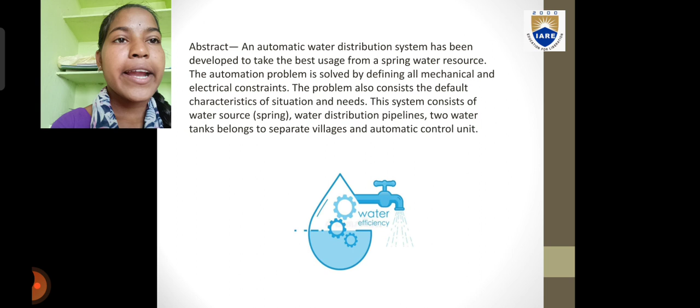The system consists of a water source spring, water distribution pipelines, two water tanks belonging to separate villages, and an automatic control unit. Now, introduction to potable water. To find potable water, which is the first indispensable need of man, is an indisputable fact. A growing population and industrialization cause environmental and water pollution.

Therefore, the problem of finding clean and drinkable water is one of the most important and emerging problems in the world. Therefore, potable water obtained from the water source most efficiently, cleanly, with less energy expenditure of consumption, and also supplied to the user is very important.

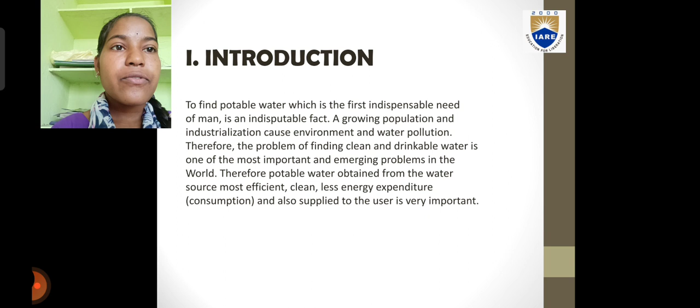The problem of control of water resources has been part of environmental, agricultural, economic, and health subjects. With the water obtained from the source, there are also some problems such as distribution, wasting, and control. Tavares has studied theoretically about water distribution networks. He has developed nonlinear dynamical models and controllers to monitor the level of the water in the canal system of NuHCC in Portugal.

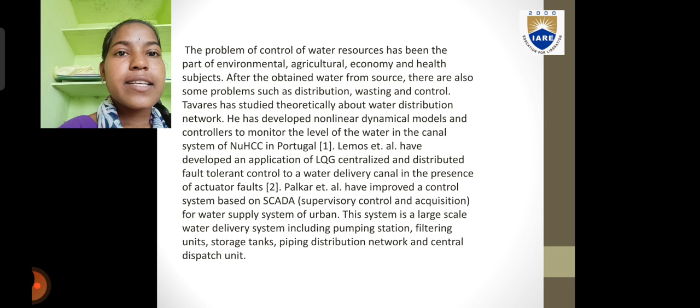Lemos et al. have developed an application of LQG centralized and distributed fault tolerant control to a water delivery canal. In the presence of actuator faults, Palkar et al. have improved a control system based on SCADA, supervisory control and data acquisition, for an urban water supply system. This system is a large scale water delivery system, including pumping station, filtering units, storage tanks, piping distribution network, and central dispatch unit.

Baume et al. have developed models and controllers for irrigation canal systems, characterized by time delays, nonlinear features, and interactions among subsystems. Corriga et al. have used structural Petri nets for modeling of irrigation canal networks. Because of diverse and comprehensive literature, only the water canal networks and control of water levels and pressure were examined. In this study, a virtual water resources automation problem is solved by defining all mechanical and electrical constraints.

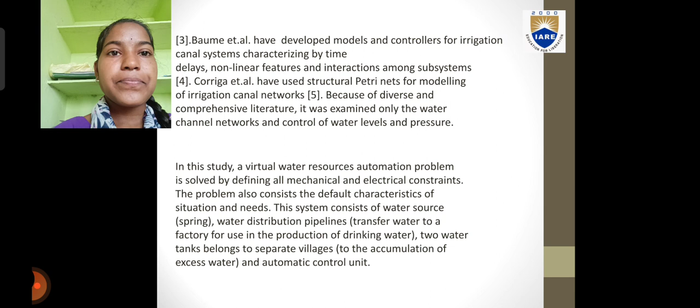The problem also consists of the default characteristics of situation and needs. The system consists of a water source spring. Water distribution pipelines transfer water to a factory for use in the production of drinking water. Two water tanks belong to separate villages for the accumulation of excess water. And an automatic control unit.

A choice machine algorithm is used for solving the problem, with an electronic platform on which to run the algorithm. The system features are expected considering that the unit is divided into different tasks. The characteristics of each unit, tasks, and equipment planned to be used are determined.

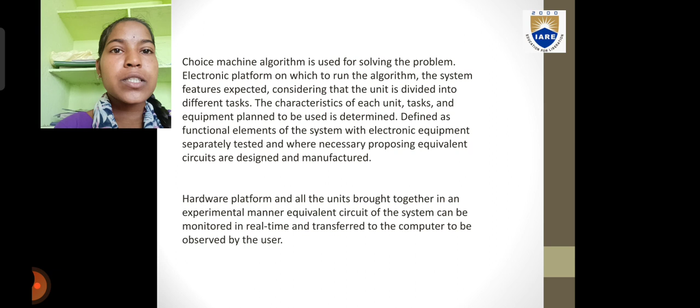Defined as functional elements of the system, electronic equipment is separately tested and, where necessary, equivalent circuits are designed and manufactured. With the hardware platform and all units brought together in an experimental manner, the equivalent circuit of the system can be monitored in real time and transferred to the computer to be observed by the user.

Material and methods. Problem. The intended embodiment is a remote monitoring and automatic control system of a water supply. A certain amount of the total water generated should be primarily forwarded to the factory so that the source can be used efficiently in all conditions. Once this condition is met, the water will be stored at equal levels in two separate tanks to use as potable water in residential areas near the source.

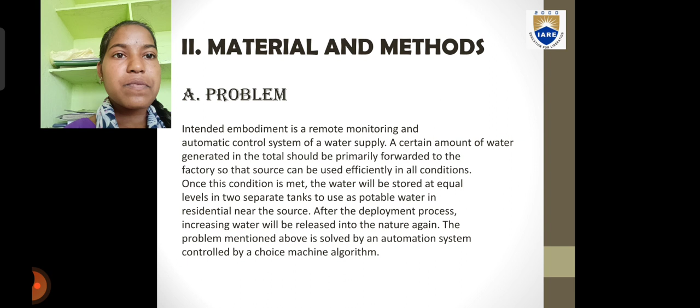After the deployment process, excess water will be released into nature again. The problem mentioned above is solved by an automation system controlled by a choice machine algorithm. Modeling of water supply automation system. Due to geographical conditions, it is assumed the main source facility is unable to connect to the village stores with wired communication. Therefore, storage nodes placed in the store have to communicate wirelessly with the central control unit.

The waterway system is made with two outgoing lines for each store, two conveyance lines for the plant, and one flood line to protect the facilities from very high spring flow. These five different lines from the water to the arriving points will be redirected by using the choice machine algorithm. The algorithm will generate commands to control opening and closing of each valve.

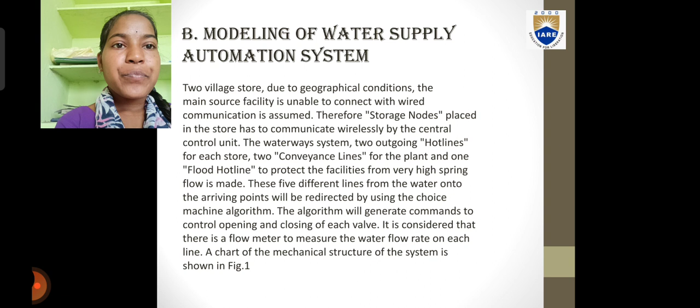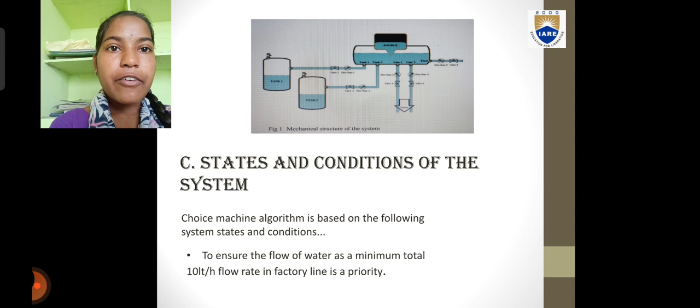States and conditions of the system. The choice machine algorithm is based on the following system states and conditions: to ensure the flow of water, a minimum total 10 liter per hour flow rate in the factory line is a priority. The level of water to be transferred to the tank has to be observed continuously. The difference of the two tanks' water level should not be more than 30% of the total volume.

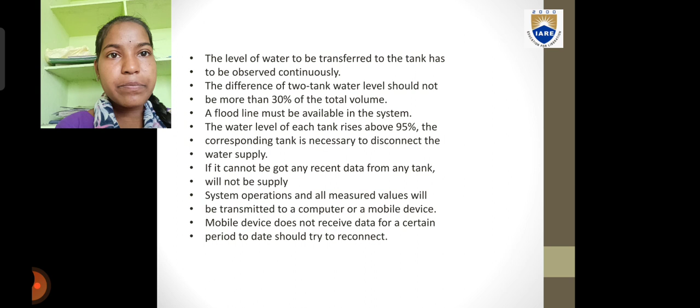A floodline must be available in the system. If the water level of each tank rises above 95%, the corresponding tank is necessary to disconnect from the water supply. If no recent data can be got from any tank, it will not be supplied. System operations and all measured values will be transmitted to a computer or a mobile device. If mobile devices do not receive data for a certain period, they should try to reconnect.

Limits of the system. The water supply can provide a maximum 100 liters per second flow rate. The facility is assumed to be strong to sudden changes in water flow, resistance from inertia and surface effects. Each of the water channels has equal diameter, so that the water from the source is assumed to be divided into equal flow. The maximum flow rate in each line used in the system allows 40 liters per hour. Valves regulating water flow can be opened and closed quickly enough.

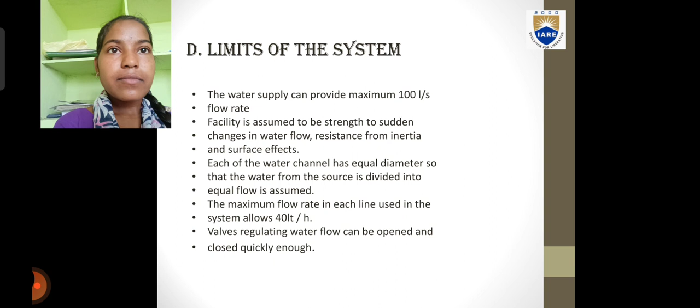Choice machine algorithm. In order to solve the problems described above, operation of the system is simply explained by a flow diagram. Basic inputs and outputs of the system are the flow rate of water supply, water level information of both stores, and the output of all valves' open or closed position knowledge respectively. Operation of the system will be provided with the choice machine algorithm. A simple block diagram for this algorithm is shown in the figure. This is the block diagram of the choice machine algorithm for the system.

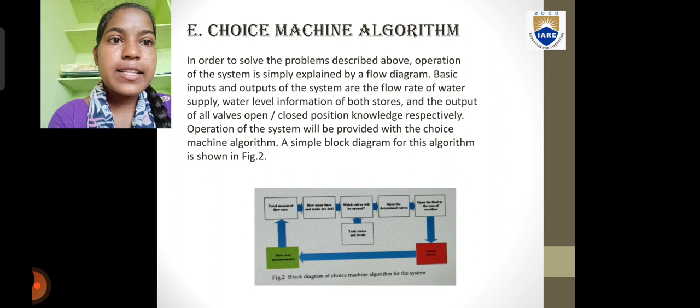Design and implementation of the system. For solving the above mentioned problem, an electronic microcontroller based system has been implemented to collect and interpret the data taken from industrial sensors, which are scheduled water level and flow rates. The aim of the hardware is to interpret sensor inputs, to run the choice machine algorithm, to ensure control of the valves and to feed the user interface about the functioning of the whole process. The elements constituting the hardware platform and their tasks are detailed below.

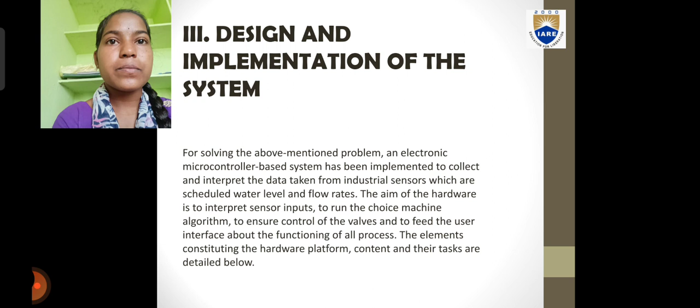Sluice control unit. The sluice control unit of the system is assumed as a bridge between wired and wireless connections. It controls all the data being transferred by RF and RS232 protocols. The sluice control unit consists of TEDAS node RF V2.1 and TEDAS sink card. This is the sluice control unit.

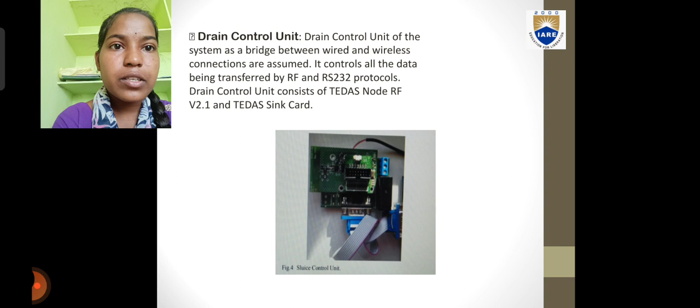Tank nodes. There are two storage nodes in the hardware platform. These nodes control the level of occupancy of each water tank and transfer the readings obtained with the RF link to the sluice control unit. Tank nodes consist of TEDAS node RF V2.1 and Prosonic T FMU30 ultrasonic level meter. This is tank nodes. The user interface unit, UIU, transmits the knowledge of water levels, flow rates of transmission and flood flow lines, and the status of valves to PC, tablet PC or mobile PC.

The entire system is an electromechanical property. Therefore, for the realization of system flow, the electronic hardware platform has to be positioned on the water supply mechanical system according to their duties. Integration. Electronic control of the line valves and flow rate meters will be provided by the central control unit. So, this unit is also located in the same building where the water supply is. The sluice control unit communicates with the central control unit via RS232 connection, so it will have to be found close to this unit. Tank nodes will be found on the tanks to which they are attached.

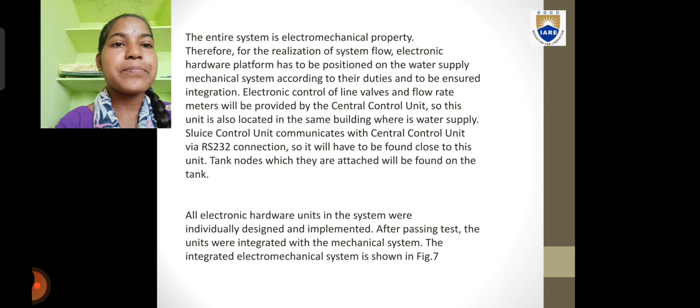All electronic hardware units in the system were individually designed and implemented. After passing tests, the units were integrated with the mechanical system. The integrated electromechanical system is shown in figure 7. The integrated electromechanical system.